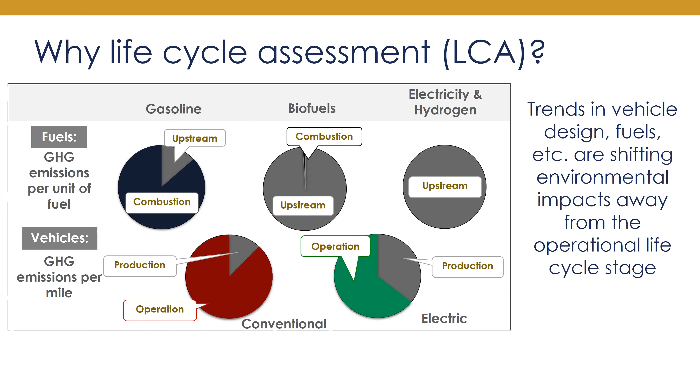So I've used the term life cycle assessment or LCA. And just to clarify what this means, it's a structured environmental assessment method where we quantify environmental flows and their impacts for a product or service from a cradle to grave perspective. So we're tracking material and energy inputs and waste and pollution outputs at each life cycle stage, but we also think about the supply chains that deliver us those material and energy inputs. And we consider transportation at each stage.

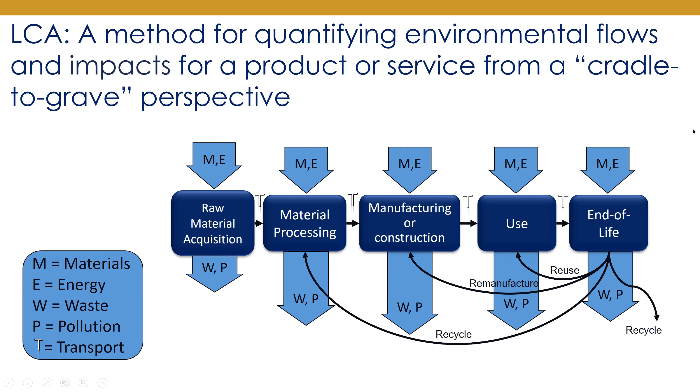So also another point of clarification, life cycle assessment traditionally considers a whole range of environmental impact categories. But as you'll see, a lot of electric vehicle and automotive assessments in general have really focused on greenhouse gas LCA, which we often refer to as carbon footprint. This is acceptable in a lot of cases when we're really concerned about climate change impacts.

But to be clear, if we want to understand the full burden of impacts associated with the technology, for example, we really want to think about multiple environmental impacts so that we don't trade one impact for another. With that said, I'm going to focus on carbon footprints or LCA of greenhouse gas emissions.

So a review of previous LCA studies of battery electric vehicles or BEVs have almost uniformly considered small, efficiency-oriented electric vehicles. These are basically modeled on the first-generation Nissan Leaf that had approximately 25 kilowatt-hour batteries. Most of these studies found that, or in fact, almost all of them found that the composition of the electricity grid that charges them

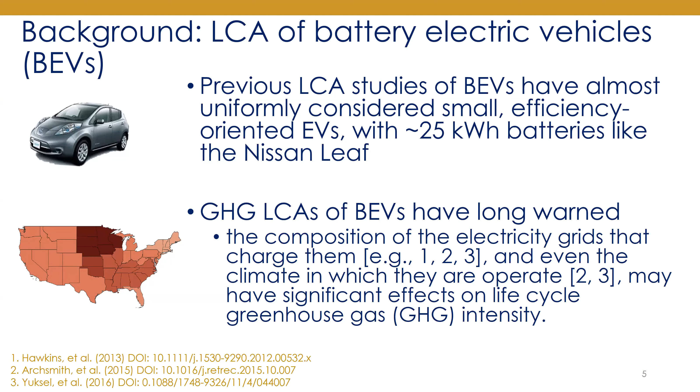is crucial to understand their performance. And in addition to that, the climate in which they operate is very important. And because of this, we really have to think about the spatial and temporal dynamics of where these vehicles are operated and how the grids that they operate on might change over time.

In addition to thinking about trends in electricity grids, we also need to think about trends in vehicle design. And this is something that hasn't been considered in previous studies. So if we look at this data here, this is sales data starting in 2012 through the first or second quarter of 2019. And what I'm showing in the dashed line up there is the average, essentially battery capacity of what's being sold.

And the yellow line above it, or that crosses it, is a sales weighted average of battery capacity sold in any given quarter. And what you can see is that between 2012 and the beginning of 2019, we saw dramatic increases in the average vehicle battery capacity, from about 25 in 2012 all the way up to about 70 in 2019. We also saw big changes in the types of vehicles that were being sold.

So the Nissan Leaf is shown in navy blue, and you can see that those small sales in 2012 were dominated by Nissan Leaf. Then we saw the Tesla Model S come online and take a reasonably large share of those sales. But then if we look out to 2018, for example, Tesla Model 3 and the Tesla Model X are all large and important vehicles out there. You also see the Chevy Bolt that came online in yellow there.

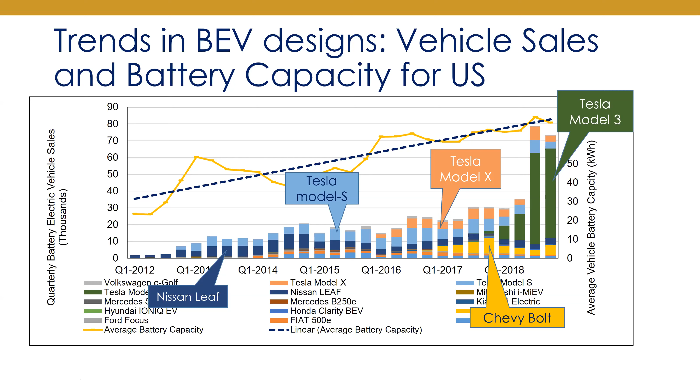The reason I'm highlighting these models is that these are very different types of electric vehicles. And we're going to talk about how that can affect what we can say about the life cycle impacts of electric vehicles. Some of this trend in vehicle change can be explained in part by dramatic decreases in battery costs and increasing performance of electric vehicle batteries.

So what happens to our understanding of the life cycle impacts of battery electric vehicles when we account for some of these important trends? So in terms of vehicle design and market trends, with these decreasing battery pack costs, we might see increasing battery pack size, even in efficiency-oriented vehicles, and greater dominance of luxury and high-performance cars in the BEV sector. We might also see the adoption of shared and autonomous vehicles, especially as high-mileage applications are enabled by these larger batteries. In addition, we have electricity fuel mix trends.

So as electricity grids decarbonize, especially where BEVs are being adopted fastest, like in California, we see the operation-related impacts of electric vehicles dramatically reduce, but potentially the production-related impacts of these vehicles increase. Okay, so the implication of these trends, likely to be bad, are the fact that large and high-performance electric vehicles mean larger batteries and designs that may not focus on efficiency. And in addition, we might see increasing investment in lightweight materials to deliver on performance and efficiency as well.

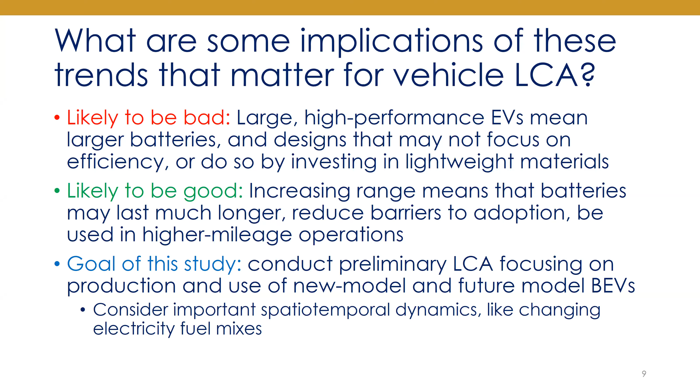And so from this, we developed a study where our goal was to conduct a preliminary LCA focusing on production and use of new model and future model BEVs, considering only the most important spatio-temporal dynamics like changing electricity fuel mixes. Our modeling approach for this was to take three what we call archetypal BEVs. So an efficiency-oriented compact vehicle, you can think here Chevy Bolt, a performance luxury sedan, here you can think Tesla Model S, and a performance SUV, and here you can think Tesla Model X.

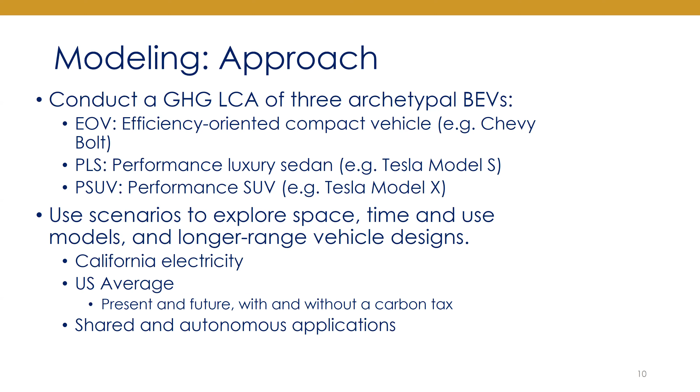We use scenarios to explore, in addition, the other trends that we think are going to happen over time. So the trends in terms of the electricity and the difference in space and time, so California versus US average, and then present and future grid mixes, but also some alternative use models, such as shared and autonomous applications.

To do this, we combined existing and new LCA models for vehicle components and systems. So we used a battery LCA model from Ambrose and Kendall, but this was actually built on BATPAC, which is a model out of Argonne National Lab. And for our vehicle model, we used GREET, also out of Argonne National Lab.

And then we used a number of methods to estimate use phase impacts under different scenarios, including annual mileage estimates from the National Highway Transportation Survey, or NHTS. And then also it used FASTSim, which is a model to try to estimate fuel or energy efficiency of vehicles.

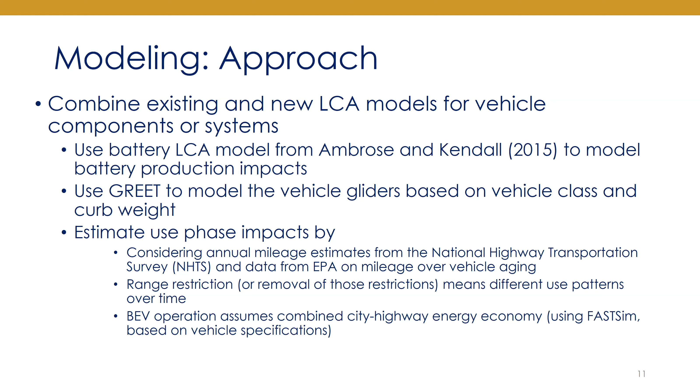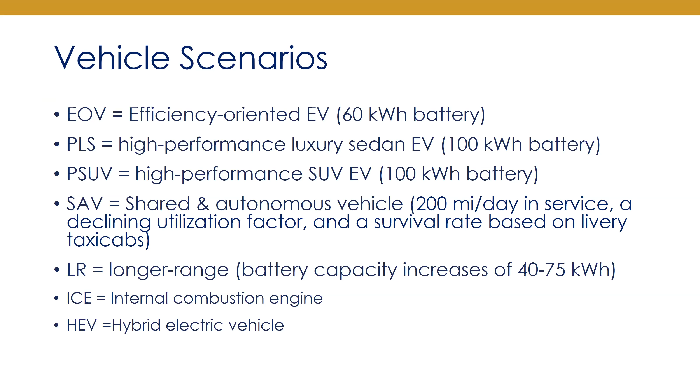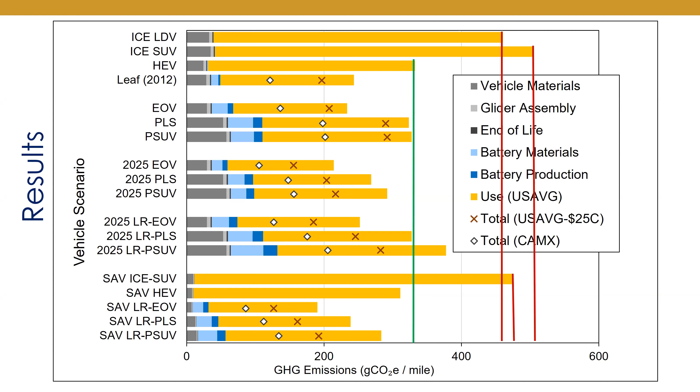Now I'm going to show you the first takeaway, which I think is important to keep in mind, is the fact that compared to ICE and HEV vehicles, our electric vehicles do very well. Okay, so even compared to a hybrid electric vehicle, essentially nearly every case for our electric vehicles perform better, meaning they have fewer emissions per mile. With that said, there are significant differences between the values we see for electric vehicles operated on the average US grid and electric vehicles operated in California.

So if we start by talking about the US, we have our US average, our business as usual case with yellow bars, and then the case with the carbon tax with the red X mark, and then for California, the black diamond. What I want to highlight here is that if we think about operating an electric vehicle in California, the vehicle production is in quite a few cases more than half of the impacts. So that's a dramatic change to how we think about impacts happening.

If you look up at a light duty vehicle ICE, which is the top bar on this chart, the vehicle production is a very small part of the total life cycle impacts. And so I think it does tell us that we need to maybe shift the way that we think about vehicle impact, especially as we move towards decarbonized grids and electric vehicles. I also want to highlight on the bottom here the shared and autonomous vehicles, or SAVs.

The first thing to observe is that there are definitely great benefits to adopting electric vehicles in these applications relative to, for example, an ICE SUV. With that said, I also want to point out that the production-related impacts for the vehicle and the batteries here are much smaller relative to operation, and that's because they're being used a lot every day, right?

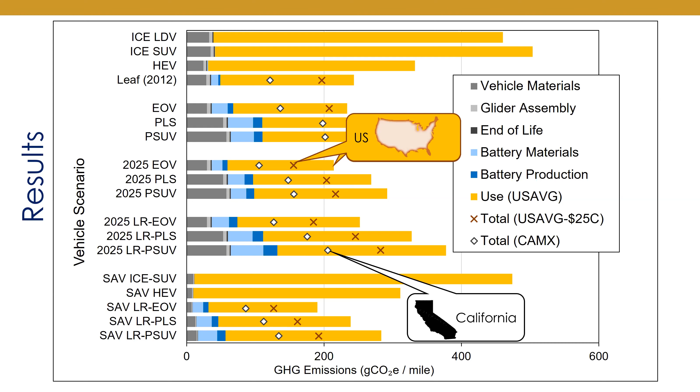I also want to bring up another point, which I think also often comes up when we talk about the life cycle impacts of electric vehicles, and that's the end of life for batteries. So the fate and reuse or recycling potential of batteries at their end of life is really quite uncertain, and there's, I think, been a lot of information out there about the potential problems associated with these batteries. So the first thing I want to point out is that there are unlikely to be large greenhouse gas related impacts associated with these end-of-life batteries.

And the second thing I want to point out is that there are other environmental impacts that probably are of concern. Like many electronic waste, there are constituent materials that are of concern in here. There are some issues associated with how we understand what's going to happen to these batteries. One of them is that the falling cost of batteries and relatively low value of constituent elements, if we recycle them, present challenges for robust recycling systems.

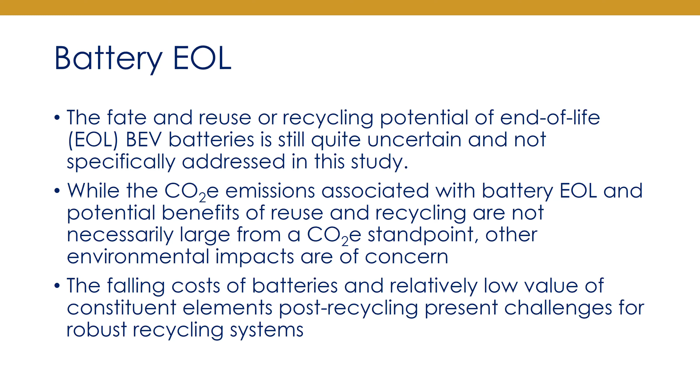With that said, there are actually a lot of alternatives for how we manage these batteries at end of life. Here I'm borrowing an image from the ReCell Center, led out of Argonne. And we can see here that there are a number of options. There's reuse or cascading uses, so secondary applications. A lot of people envision using these batteries, for example, to provide grid services or to help integrate intermittent renewables on our grid. The next is recycling and refunctionalization, or direct cathode recycling.

And these are all different ways where we can actually either recover the materials that are in the battery, or perhaps better yet, essentially directly recycle the cathodes in these batteries and make these batteries functional again, and not lose all of the investment we made in producing the batteries in the first place. And then finally, there is the option of direct disposal, meaning that we don't actually do anything with these batteries.

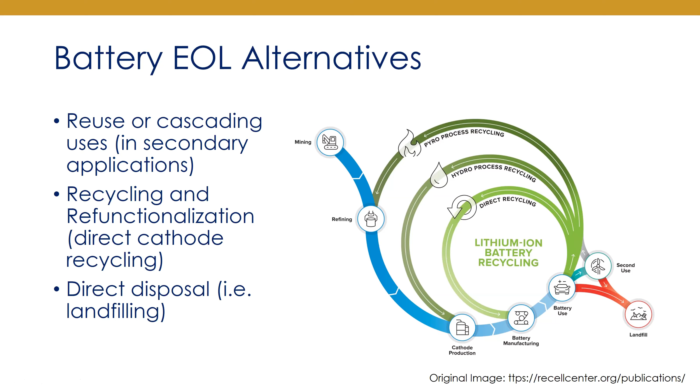It's going to be a long time till those recycled materials make an important contribution to the total material flow. And that's partly because we have really rapidly increasing demand for batteries. So the amount of material demanded in the future is much higher than now. But we also have the fact that these batteries are going to be in use a pretty long time. And if we put them in secondary uses like grid services, for example, it's even longer. So you're looking at lifetimes of, say, 1 or 2 decades before these batteries become available for recycling.

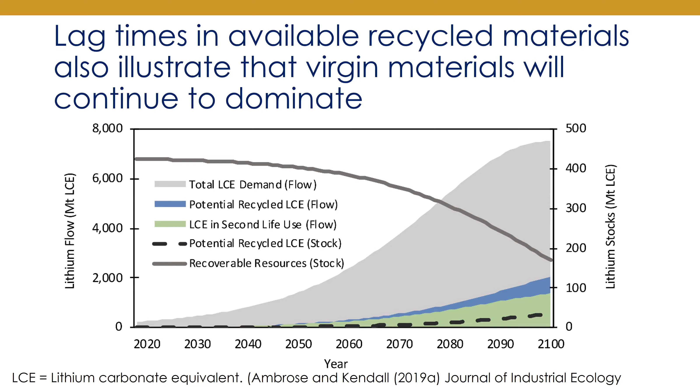So while the end of life of batteries is an environmental issue, there is some time for us to develop robust reuse and recycling infrastructure or policies to avoid unintended consequences of all of these batteries being retired at the end of life.

So some broad discussion of the findings from this work. First of all, some of the key conclusions of those previous studies, those ones that looked at 24 kilowatt hour batteries in something like the original Nissan Leaf, are still pretty similar. So where you charge a battery electric vehicle matters. And most of the time, BEVs outperform comparable ICE vehicles from a CO2 equivalent standpoint.

The relative contribution of emissions from vehicle and battery production, however, is increasing on a grams per mile basis. And this is a change from those early studies. It also gets more important over time, and that is for two reasons. The first is the decarbonization of electricity grids, but the second is the fact that we're investing in bigger batteries and high-performance vehicles.

From this, we might ask an important question, which is, do we need life cycle-based fuel economy or energy efficiency standards to achieve climate mitigation goals from light-duty vehicles? Finally, for the battery end of life, my message is to stay tuned. There's a lot of potential innovations that could occur to address the problem of end of life batteries that are coming on the market, and also policy development that could shape it.

So I mentioned the fact that our new findings might really shape or might bring into question whether the way that we manage light-duty vehicles from a policy context is really complete. So right now, we really think about vehicle operation, whether it's tailpipe emissions or fuel efficiency standards. This is what we've, for a long time, used to manage the performance of vehicles on the road.

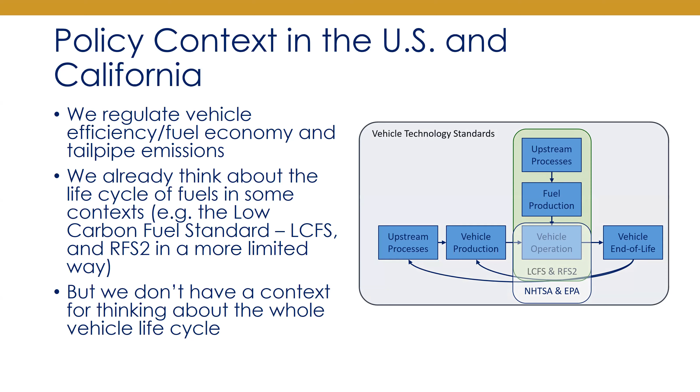So one question to ask is whether life cycle-based policies are needed. So by omitting life cycle emissions, could we come up with a paradoxical policy outcome, meaning that we intend to favor vehicles with lower greenhouse gas emissions, but instead favor vehicles with higher emissions?

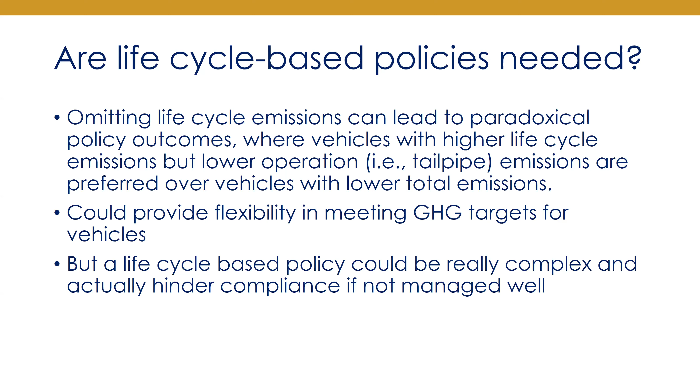The other question to be asked is whether there are benefits to life cycle-based policies, like flexibility for meeting greenhouse gas targets for vehicles. Of course, one of the big challenges is the fact that a life cycle-based vehicle policy could be really complex, and it could be really hard to achieve if it weren't developed and managed well.

I also want to point out that life cycle-based policies are relevant for internal combustion engine and HEV vehicles as well. And this is an older study, but it looked at the effect of lightweighting on life cycle emissions and showed that there are definitely cases where achieving lower emissions during the operation of a vehicle through lightweighting materials could actually lead to significant increases in life cycle emissions.

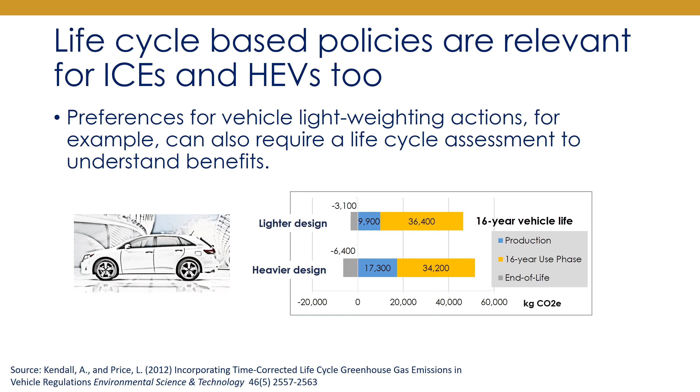And here you see the lighter and heavier designs, and it's important to think about what you're actually doing when you're actually trying to achieve total life cycle emissions reductions, even for conventional powertrains.

So back to the question about life cycle-based policy, maybe the most important one is, could it be done? So I'm just going to review a few existing policies that incorporate life cycle thinking or use life cycle assessment to think through whether or not we could come up with a vehicle-based life cycle policy.

And I'm going to look at experiences from biofuel policy, looking at the environmental product declaration system, which here in the US has probably been adopted mostly through the LEED building certification system, which I'll talk about. We'll also briefly talk about the end-of-life vehicle directive in Europe. And one thing to keep in mind is also whether eco-labeling schemes could be an alternative for vehicle life cycle policy. So first, I'm going to talk about actual life cycle-based policies.

And really, there's only one class of policies that have implemented life cycle carbon accounting or greenhouse gas assessment, and those are the low carbon fuel standards. And in California, these are implemented through essentially a common government provided model that's based on a California version of GREET. And it's used with the option for producers to submit their own calculations for life cycle emissions of their fuels. The reason I'm highlighting how this is implemented is that in this case, the government has defined many of the assumptions that would go into any life cycle assessment.

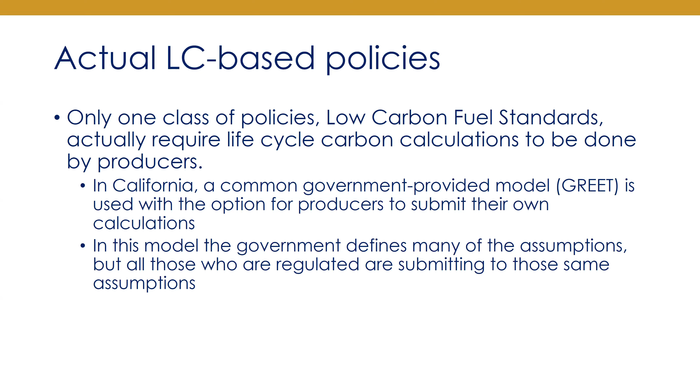And this is really important because without that kind of common modeling tool or GREET, there'd be a huge amount of flexibility for fuel producers to play around with. So this is directly from the Low Carbon Fuel Standard website, but you can see that with these fuel pathways that they've come up with, you can request a fuel pathway to receive a carbon intensity score through the policy.

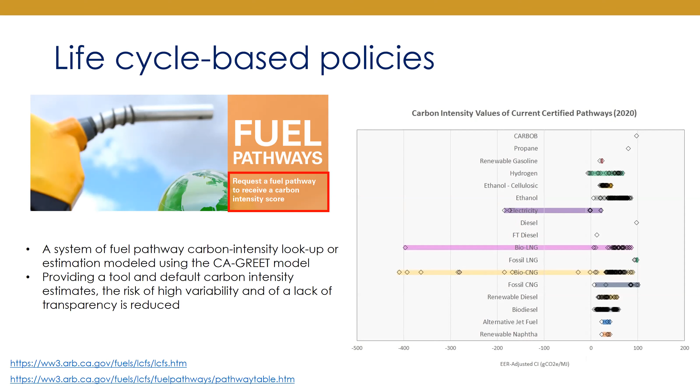And in this case, what I want to highlight is that the tool provides default carbon intensity estimates, but also the option for producers to request their own carbon intensity scores. But by using this common model and getting approved through a common system, the risk of high variability and a lack of transparency is reduced.

In a completely different context, I'm going to talk about LEED, which is a voluntary program. So the Low Carbon Fuel Standard is not voluntary, but the LEED program is a green certification program that is voluntary. And what LEED has done is that it has integrated life cycle assessment through environmental product declarations, or EPDs. The way they've done this is they offer extra points for certification if contractors source their materials with EPDs, meaning that they purchase a material that includes an EPD. Within a short time frame of LEED doing this, we saw a real explosion of new EPDs for North America focused on construction materials.

And the reason this is interesting is it's very influential, but it's also a voluntary certification system. And so this is not implemented by government. It's just a voluntary certification. So I use the term EPD, or Environmental Product Declaration. And EPDs require what's called a product category rule, which defines how an LCA is done for a particular product category. And so we would need to develop essentially product category rules for vehicles if we were to envision using these as part of a life cycle-based policy for vehicles.

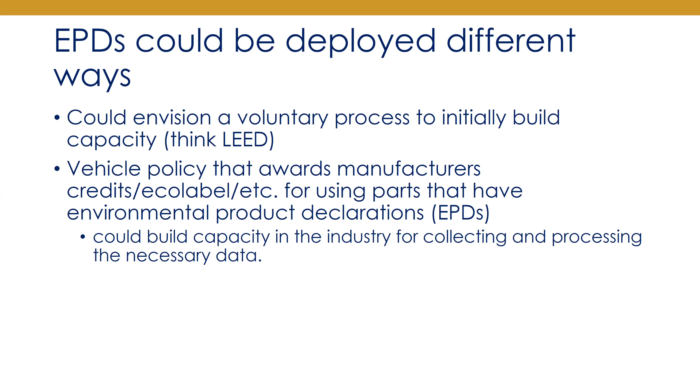So in terms of EPDs, we could think of them being deployed in different ways. So you could envision a voluntary process to initially build capacity, like LEED has done for construction materials. You could also think about vehicle policies that award manufacturers credits or particular eco-labels for using materials or products that have EPDs associated with them. And these would be sort of ways to build capacity in the industry for collecting relevant information for these things before implementing them in some sort of strict regulatory environment.

And I already talked briefly about Europe's end-of-life directive, but the reason it's a good model for us to think about is that this directive has required the labeling and tracking of parts associated with vehicles. And this would be required as well in any kind of life cycle-based policy, especially if it was associated with a kind of EPD type model. It could also be used in the context of something like the Low Carbon Fuel Standard's use of the GREET model, where you would report material type and weight, for example, based on part information, and link it to a centrally managed model.

Okay, so what could we conclude from this? First of all, I would say that EPDs for every part would be kind of a wild west at the beginning, but it might also provide for a lot more innovation than a low carbon fuel standard-like approach, where you have some centralized model that you use to conduct calculations. On the other hand, that centralized model could guarantee more transparency in calculations and probably more traceable carbon intensity estimates. A perfect scenario might combine the two of these approaches. So EPDs for every part, for example, but consistent underlying data and assumptions to minimize gaming the system and to minimize the risk of very high variability across calculations.